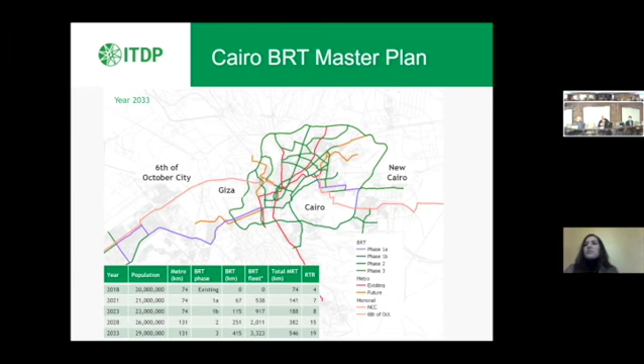So to focus on the BRT corridor that we have been planning, it's a 41.5-kilometer corridor that connects central Cairo to the outskirts of Cairo in 6th of October city. And it has 34 stations, 3 terminals, and 1 depot. This project we have been working on with UN Habitat and the Ministry of Housing.

And the status of that project is that the ministry is currently reviewing the procurement packages, and they're planning to tender it out hopefully by mid this year. Construction is estimated to take around 2 years. So we hope that 2 years from now, we would have the BRT operational here in Cairo.

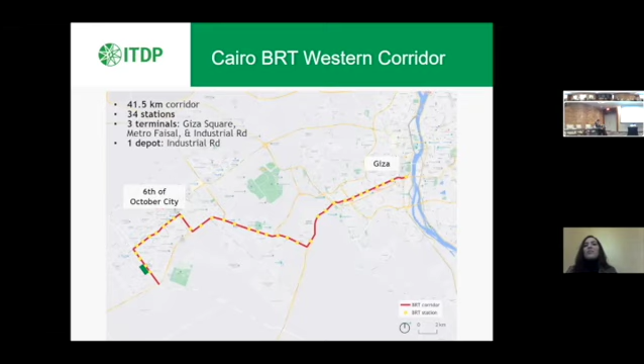So for the planning process, we really started from scratch because the available public transport data were not much. So we have done passenger demand assessment, we have done corridor identification and selected that corridor that I just viewed. We have prepared a service plan, and also have done concept and detailed designs for the corridor. The last 2 steps, that were concurrent, were the financial model and the business and institutional plans.

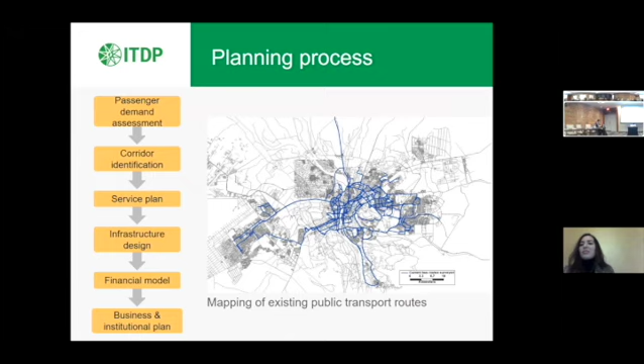So as you can see here, this is a mapping of the public transport routes. We mapped almost 200 routes. And this is part of the data collection that helped inform the service plan, passenger transport volumes. We looked at the speeds, and also at the different boardings and alightings in different areas.

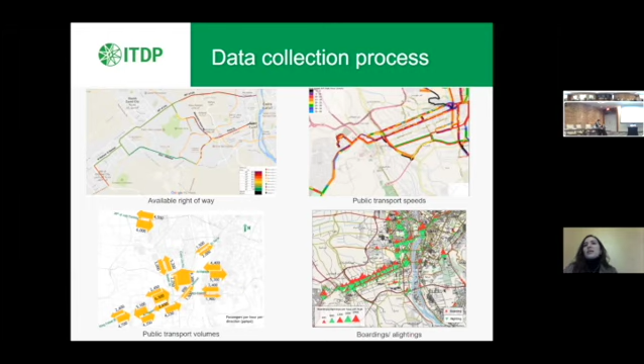As I said, there was also a gender component that helped the design of the corridor. So we have done different types of surveys like frequency, occupancy, and gender counts to count the number of passengers in each vehicle and distinguish them by gender. We have done operator interviews to assess the level of gender sensitivity awareness among the public transport operators.

The outcomes were really interesting for those studies. So we found out that 80% of women do not have a driving license, and that 25% of public transport users are women.

Many studies show that many trips by men are work related, compared to women who had varied trips. And we found that 70% of passengers transfer at least once to finish their entire trip. Regarding experience with harassment, we asked both men and women, and they both felt that women are unfairly harassed. Also, the surveys were done not only during the ride, but during all stages of the journey, where we find that 50% walk from their home to the nearest public transport vehicle.

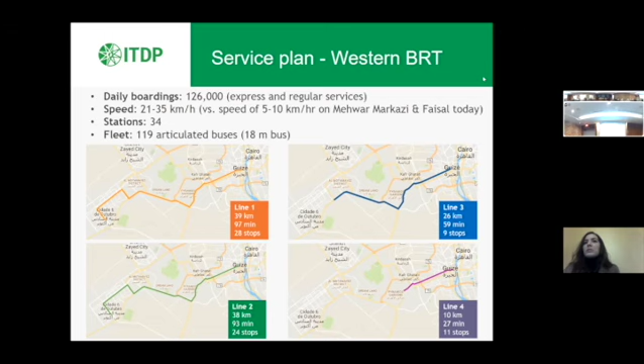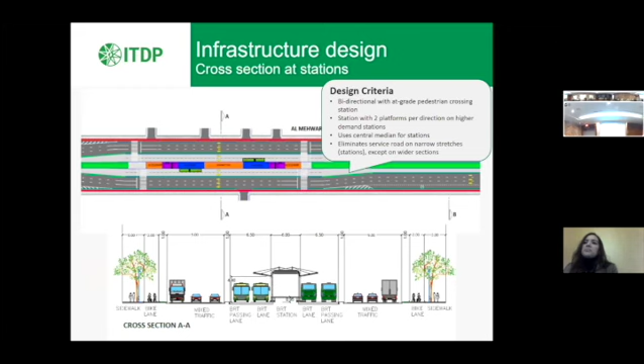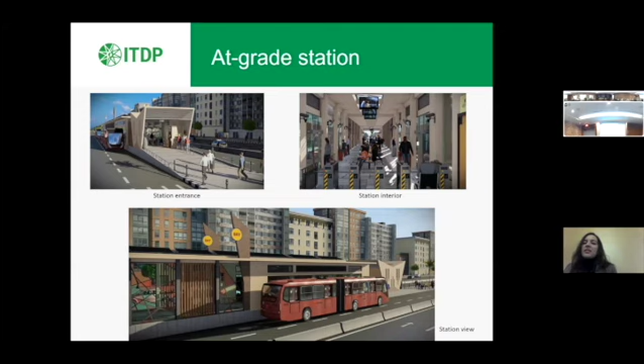This is one of the busiest streets in Cairo, in Giza. It's called Faisal Street. So this is how it looks. As you can see, most of the street consists of those small white microbuses. So imagine if we had a segregated lane for public transport, I'm sure it would be faster for all users and more convenient. And this is how we hope it would look when we have the BRT there.

So just very quickly looking into the business model. Most of the fares would go into a fare collection company, and there's a trust fund where the system will be subsidized by the government, and then the trust fund will pay the remuneration to the bus operator company. We also looked at the institutional plan, where we found the need for creating a BRT agency to look after the bus operation contracts, the fare collection, and also the station maintenance and security.